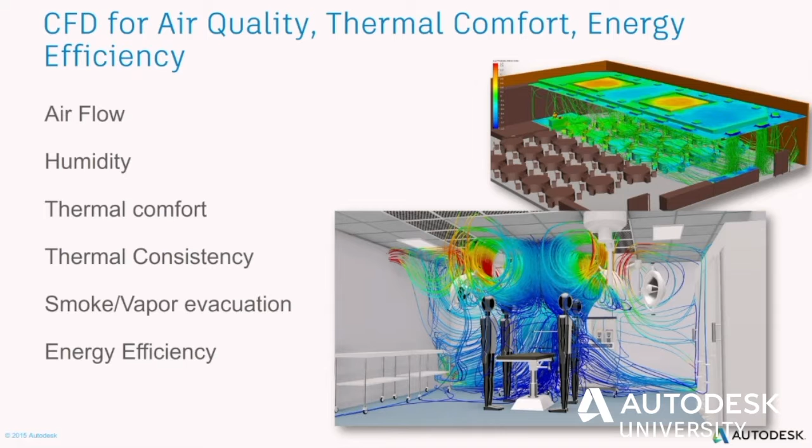I notice nobody's got the translation headsets. Is my English okay to understand? Good, excellent. I speak all over Europe, so I'm used to speaking slowly, so I'll try to remember that as I proceed.

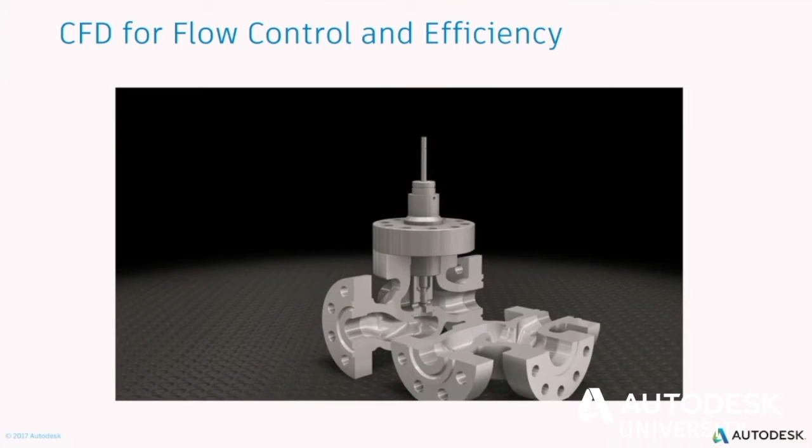So what I want to talk to you about is the role of simulation in the future of making things. I've called my presentation 'the future of making things work,' because there are all kinds of exciting technologies. If you saw the keynote addresses, more materials and manufacturing methods are becoming available to design shapes you would never have thought of in the traditional manufacturing world. But that puts additional challenges on us, the engineering corps, to make sure these brand new ideas, these ergonomic, organic shapes, actually do the job they're supposed to.

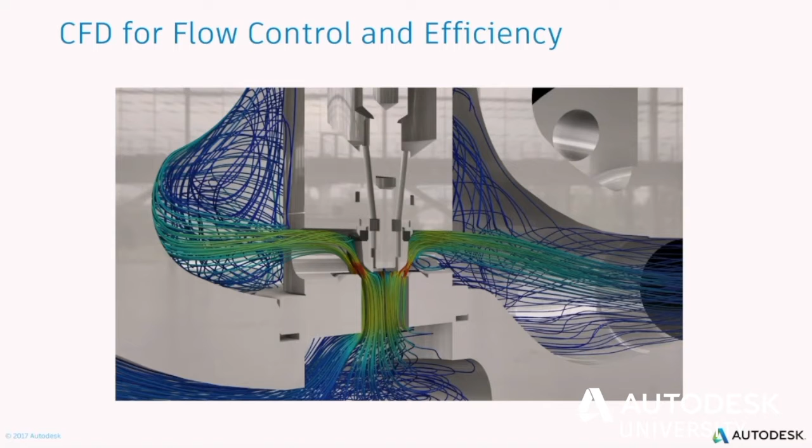So if you've followed the future of making things, you know there are a couple key factors required to succeed. The industry is looking for more customization, smarter products, and manufacturing processes that will allow you to get your ideas, your innovations, out to market faster.

To be able to customize for a market on demand requires you to rethink the way you engineer your products. The traditional methods of building prototypes are no longer going to be effective because they're too slow. Doesn't mean they're not effective, the answers are good, but they're too slow to respond to market changes. It's a crime to find that you've got this great idea, but by the time you get it out to market, nobody wants it anymore.

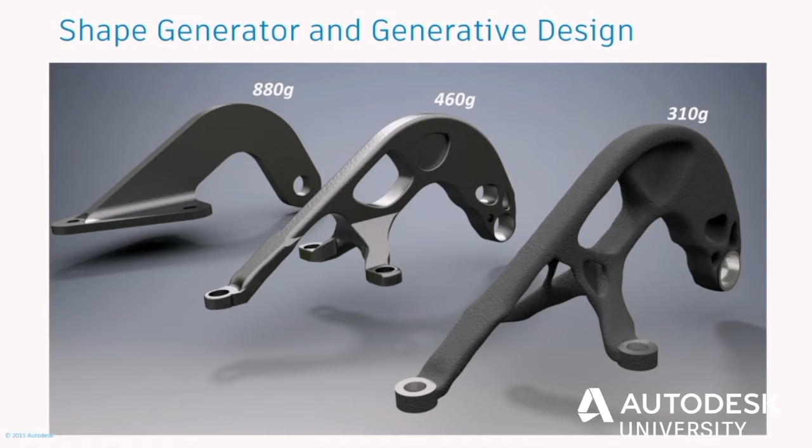That's where simulation is going to make a big difference. If you followed the story of the future of making things, you'll know we're moving from a linear manufacturing process to a more dynamic manufacturing process, where the design regularly gets feedback from operation in the field. People make decisions about how they use a product, and those decisions get fed back into the process to redesign the product, constantly changing our assumptions and consequently our decisions on how to move forward into the next design. This process adds even more questions to the engineering process than in the historic design process.

Now we've got to think about what it's going to do tomorrow. We got to think about how we're going to make this, how we're going to take advantage of new materials, how we're going to address the questions and changes that keep coming up. So we're being asked to know more.

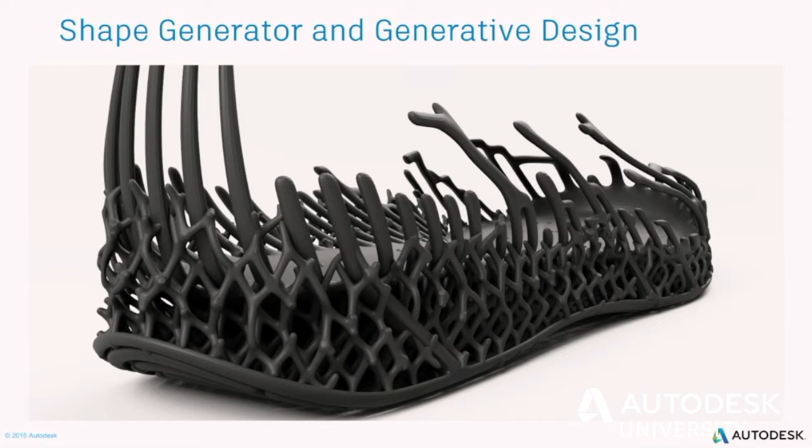I like to say that the challenge of a design engineer is making important decisions with very little information. We can't always know what's going to happen to our product, how it's going to be used, what variations in manufacturing will come into play. But we have to make decisions on what we think is going to happen. We have to use our engineering intuition to make better decisions. So now that we have more questions, we need even more information to make sound decisions.

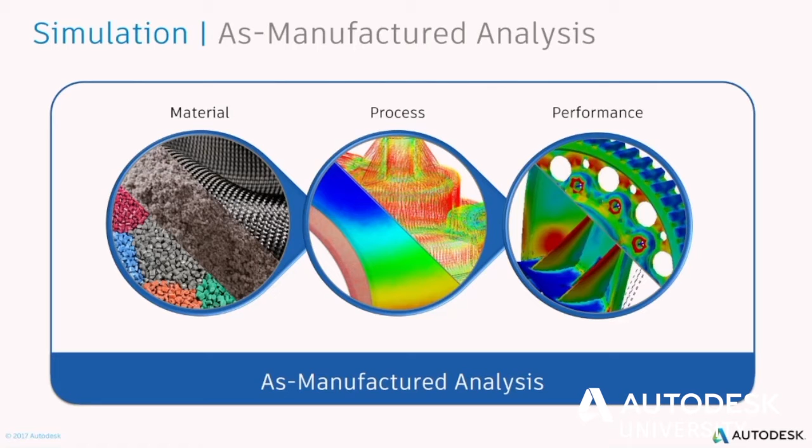Really what simulation is about is understanding the risk of not asking these questions. If you don't ask the question, or you can't get an answer, you're adding more risk into the design process. As the process moves faster and changes come more regularly, those risks start to add up over time. And that's where simulation comes into play.

So the best takeaway from this presentation, when you think about where your company is going in developing products, is that the power of simulation is to make better decisions sooner. How many times have we looked at the response of a product, or a failure of a machine, and said, I wish I'd known that was going to happen?

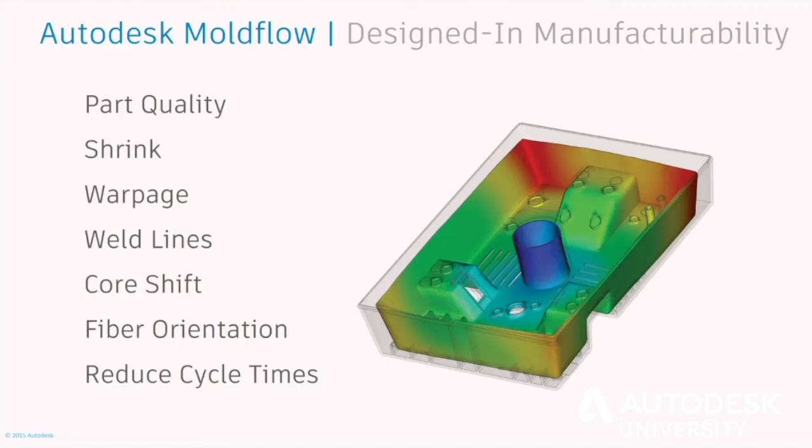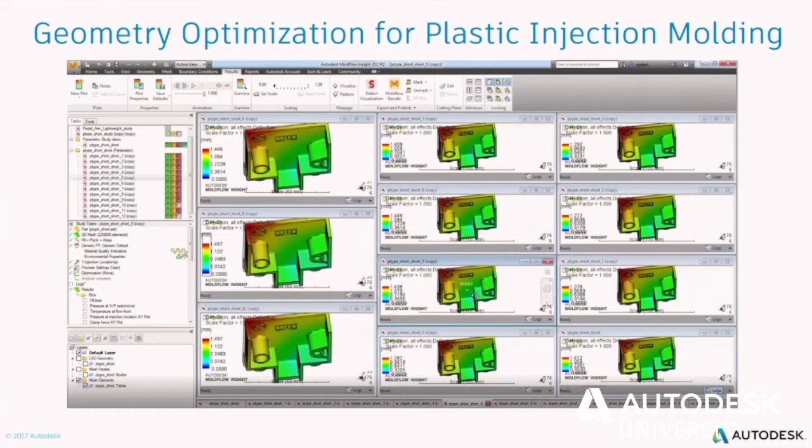Now you've got technologies, some old technologies that weren't as accessible, but you've got technologies now that are easier to use, lower cost of entry, integrated into your design platforms, be it the Inventor platform inside of the collections, or inside of Fusion 360. You've got technologies embedded into the process to ask these questions as you're designing, as opposed to the traditional process, which we call the traditional validation process, that I grew up with as a stress analyst, and that most people are still working their way out of.

The difference really comes between what we call design analysis versus validation analysis, differentiated by when the questions are asked. In a traditional validation process, which I would also include prototyping in, we don't necessarily ask if it's going to work, if our decision was good, until pretty far down the design process into prototyping or even manufacturing. At that point, the cost of making a change is extremely high.

And the impact on our ability to turn the product around or incorporate changes coming from field information becomes almost impossible. If you're working in a validation mode, the best you're going to get out of the answers to the questions are, does it work or does it not work?

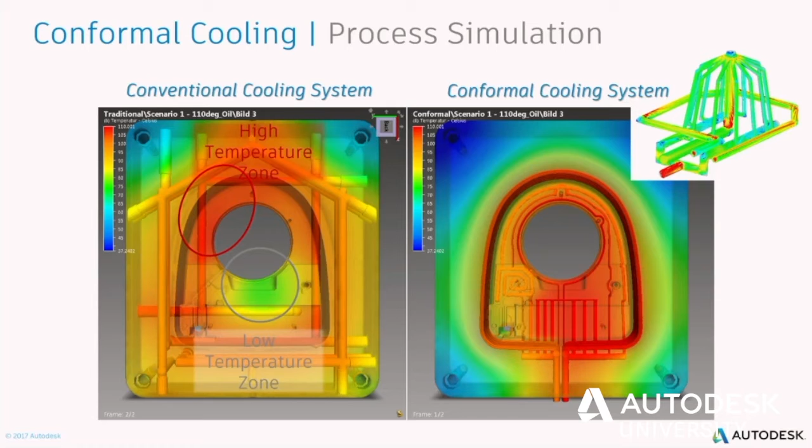Historically, that might have been enough. But when we're dealing with the future of dynamic, customer-driven change, waiting so long and finding out it's not going to work, or finding out it's working but not knowing if it's optimal, is no longer acceptable. You need to know that the innovative changes you're making will work and that they're the best approach at the beginning of the process, when you can still make changes.

If I make it square, is that good enough? Yes. Is it the best? No. Maybe I make it a circle. Is it good enough? Yes. Is it the best? Maybe not so much. Maybe it's an oval. You can ask those questions if you're getting answers at the design phase. You can't ask those questions in a validation mode. That's where simulation will greatly improve your path into the future of making things.

The three areas we have identified as benefits of having an integrated product innovation platform. There are a number of benefits of this integration. The three that simulation affects the most, from what we've observed globally, are the ability to increase your innovation, improve your product performance, and win more business. Depending on the industry you're in, some of these may be more important than others, but they're all important parts of the growth in the future of making things that simulation can impact.

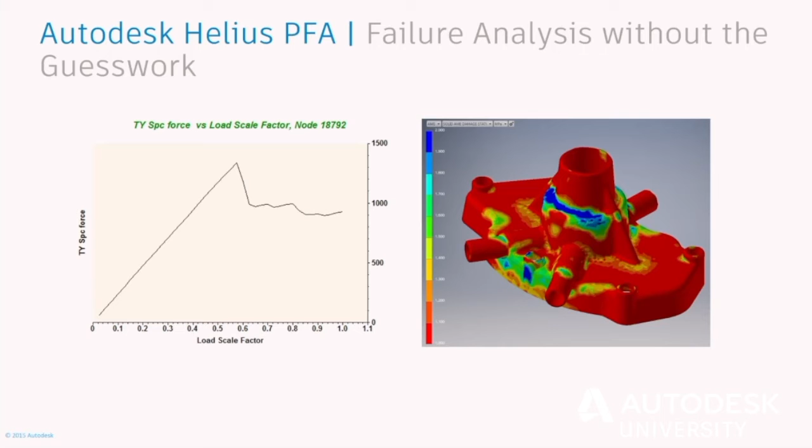So that's the first setup, and hopefully you've all had the opportunity to discuss the future of making things. These terms shouldn't be new—I think almost every Autodesk customer has heard this several times, but hopefully it wasn't the first time you heard it. What I'd like to do now is share the second half: examples of areas where we see growth, where simulation is impacting your ability to innovate and improve product performance. That's where the optimization part comes in—is it the best, not just will it work. Improving product performance, and then winning more business. We'll talk about how each of those can be impacted by these case studies.

The first one I want to share is using computational fluid dynamics in the process of architectural building construction. More and more end customers, people paying for the projects, want to make sure that the airflow is consistent. You have regular ventilation—we call it air changes per hour—that it's turned around enough so the air doesn't get stagnant, that you can measure thermal comfort, and that you've got energy efficiency.

Almost every airport I'm in, and I travel all over the world, appears to overdo it—they have huge ventilation so there's lots of wind blowing in some parts of the terminal, while other areas you sit and start getting hot. That's an area where they're probably wasting energy because they're trying to overcompensate for poor airflow with volume. They're just going to throw so much at it, eventually hoping the cold air gets somewhere.

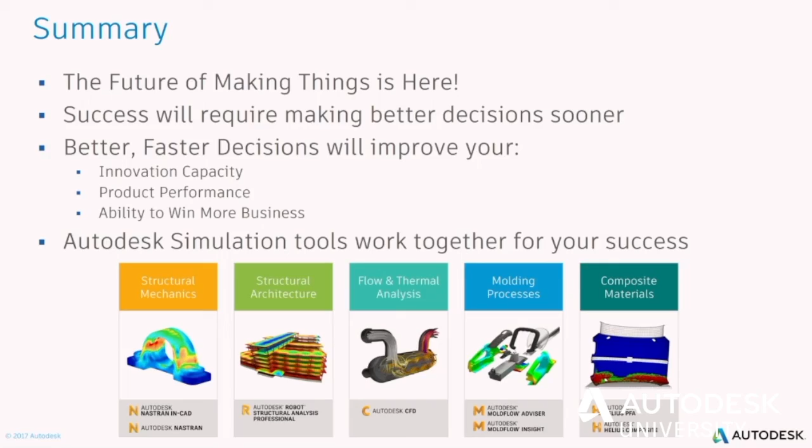So with this sort of technology, you can innovate new ways of controlling temperature, energy, and airflow. You can improve the performance of your product—a building or living space—by ensuring the temperature is uniform, and by keeping a lot of customers happy when you're making it. If you misguess, yes, absolutely, that's a business decision you have to make—there are things to account for. To me, if you know what your durability requirements are and you can design to that, you win.